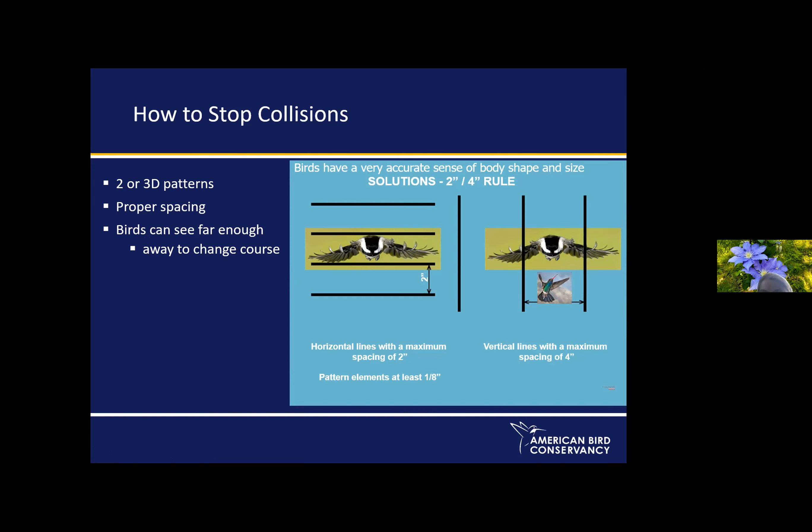We recommend that if you're using lines, which you don't have to, they be at least 1/8 of an inch wide. And if you're using dots, which is what people seem to be most attracted to, those dots should actually be at least 1/4 of an inch in diameter.

So here are just a few examples of bird-friendly buildings to show you that you don't have to warp your architecture. If you want to design a box of glass, you can design a box of glass. This happens to have a narrow horizontal stripe. It's extremely bird friendly, and yet you see out very well. And if you look at the building from the parking lot, you'd never know this was bird friendly glass.

When I first started doing this, I was taught to talk about the irony of green design, how sad it was that green design required these gigantic reflective curtain walls. It was only after I'd been working in this field for a year or so that I discovered that's not true—above a certain level, you start becoming less sustainable because you require bigger systems for heating and cooling.

So this is a really good place to start with bird-friendly design: start with sustainable design and start with a building that's going to be energy efficient. Although I realize that there are some issues with that too.

This is actually the FBI headquarters in Houston, Texas. It has this odd looking sunshade, which in addition to being a sunshade, also serves as a security device. And as you can see from most angles, most of the glass isn't very visible to birds, so it's also a bird safe device.

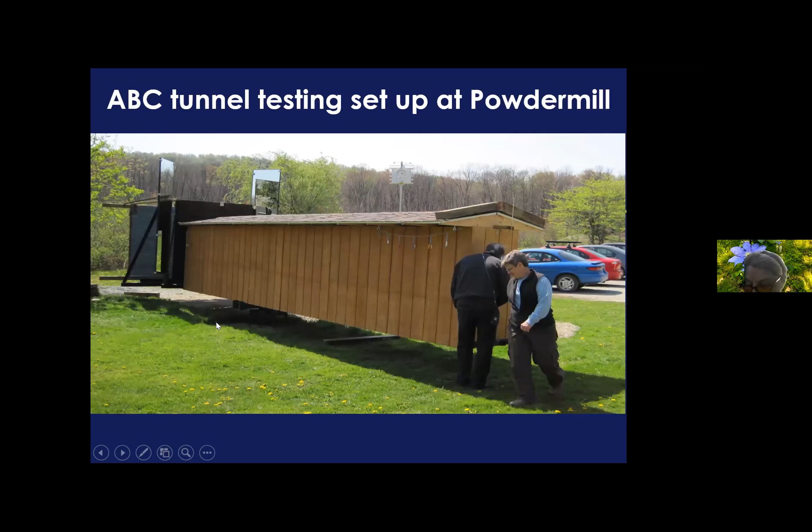So this is what it looks like when we put a bird inside a tunnel, which is what we call the thing. On the inside, birds see two possible ways to leave, and on one side usually is whatever we're testing, the other side is plain glass. You can see here there's a net stretched across the end of the tunnel so birds are not injured. As soon as birds have made one flight through the tunnel, we open this door and let them out, so we're not testing the same birds over and over again.

This is the basis of what we call threat factors, and threat factor is fundamental to New York City's legislation. It was a little bit of a surprise when they decided to do it that way. But we have been trying to expand our ability to rate glass so that this rating program doesn't become a bottleneck, and in fact, we're starting to construct a second tunnel.

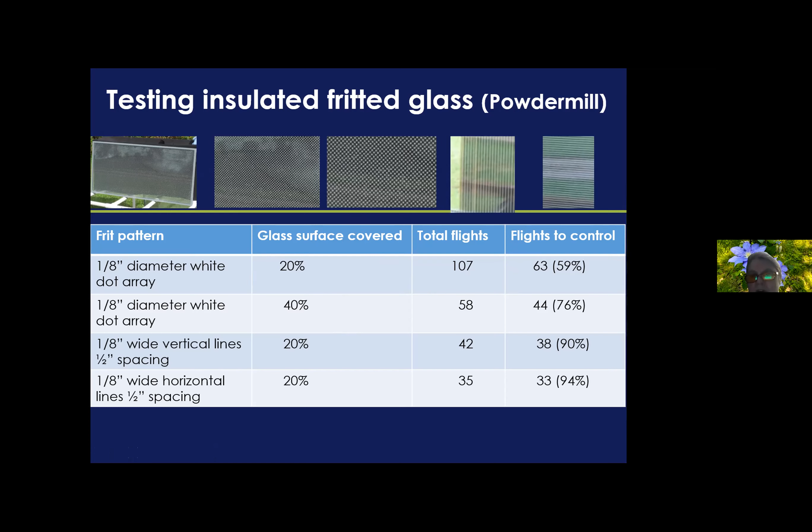I won't talk about this in too much detail, but this is one of the first things we looked at—it's why I say I hate dots. We looked at 1/8 inch dots with 20% coverage, then 40% coverage, and then 1/8 inch wide lines spaced 1/2 inch apart, back to 20% coverage. What we found was 20% coverage didn't work very well at all. 40% coverage worked a little better, but with the lines, 90 to 95% of the birds avoided the frit pattern. So lines are a much better signal to a bird. I think the dots look to them a bit like a fog bank—it's hard for them to process, and the dots are too small for them to resolve individually.

If you're interested in more resources, go to birdsmartglass.org—we've recently put a lot more information up on our website. Unfortunately our website can be confusing, so scroll down to find the menu. You can download bird-friendly building design, now available in English, Korean, and Portuguese. We also have home solution flyers available in English, Spanish, and Portuguese, which can be downloaded. We've got a gallery of designs and a searchable database of bird-friendly materials. And that is the end of my piece.

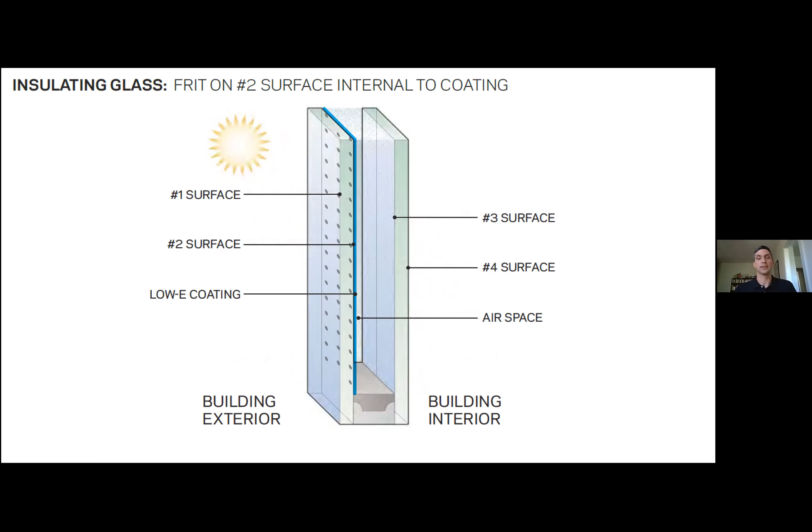Just briefly on glass—this is a diagram of insulating glass, typically two panes of glass. The outermost surface is the number 1 surface. The backside of that outside piece of glass is the number 2 surface, usually where we put a low-E coating for solar control. The inboard piece of glass has surface 3, and surface 4 faces the inside. The most effective place to put a visual cue to deter birds is on the number 1 surface, because it's most visible, in front of everything doing the reflecting. Further back, certain manufacturers can put the frit pattern outside of the low-E coating, which is also a good position. Some manufacturers have to put the frit inside the low-E coating, which is a little less effective, and less effective still further inboard.

Here's another diagram showing the newer UV patterning technology, which works a bit differently. There's the basic assembly with a low-E coating shown in blue, but outside of that you have UV patterning, similar to a low-E coating—metals sputter-coated onto the glass that reflect UV light in the UV spectrum, which birds can see deeper into than we can. Shown in yellow, a laminated lite of glass typically needs a UV-absorptive layer in the lamination, which allows the relatively weak UV reflection to actually show up against that UV-absorptive background. So just some basics there.

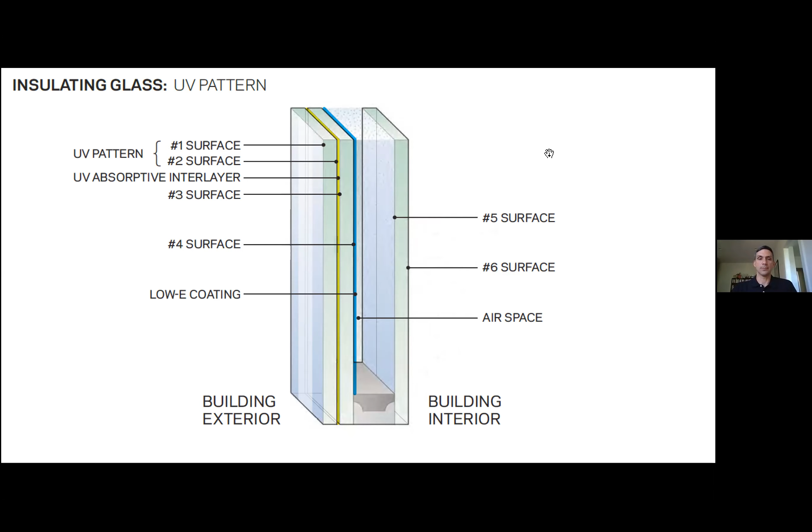Okay, here's the Center for Global Conservation. We designed it in about 2004 or 2005. At the time, Chris and other experts had some ideas about what would work in terms of bird collisions, and we tried some of them. Some worked and some didn't. It was a great lab, and it sounds like Maine Audubon is going to do something similar and test a bunch of strategies, which is great. This building was pretty important—not only is it at the zoo, but it's also in a heavily wooded corner outside of where people usually visit.

Here's some of the strategies that did not work. It was thought that overhangs were enough to deter collisions at one point. Definitively, we found that the various overhangs in the building did not deter much of any collisions at all.

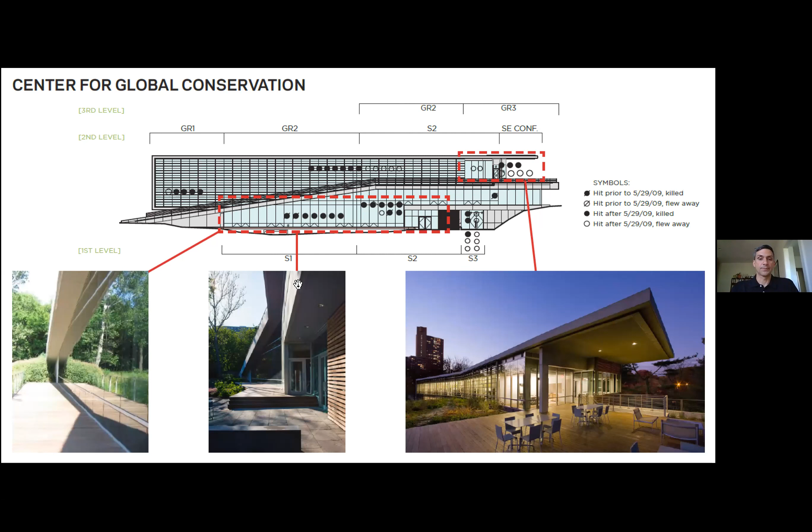We tried solar shading devices outside of the glass—these are wood slats. Unfortunately, there were supposed to be twice as many of these, so the spacing would have been twice as close. It might have worked if it was twice as close, but these ended up being about 15 inches apart from each other. It turned out that birds in flight just saw through them, and there were a number of collisions there.

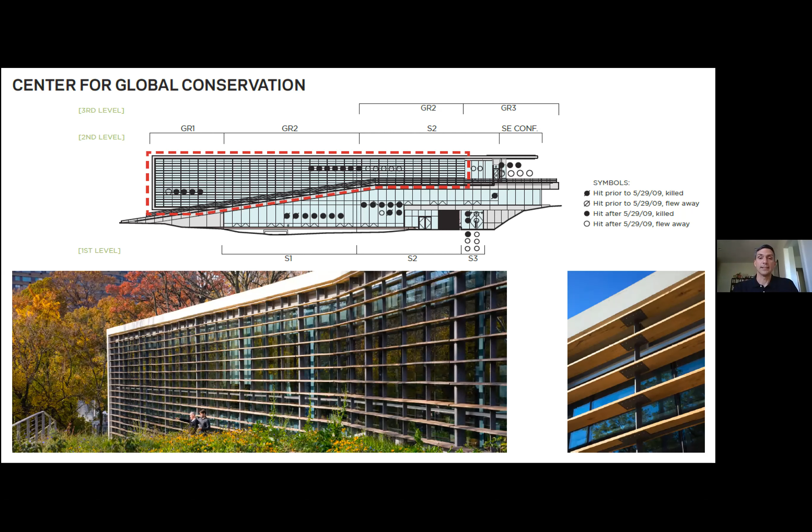I should note that on top of these images there's a diagram with black dots and circles—that's from one season of monitoring that Chris and her team performed. It's really super valuable to have that monitoring data so we could tell what worked and what didn't.

Something that did work was this UV reflective material—this is the version available at the time. I think this was maybe the second building in the United States to use this stuff, and we could only afford it in one room, the main conference room here. You can kind of see the vertical lines of it in the image, but being in the room, it's very unobtrusive and doesn't call attention to itself whatsoever. In this particular migration season, they had no collisions on that glass, and I believe they haven't had any collisions at all. So it actually worked very well.

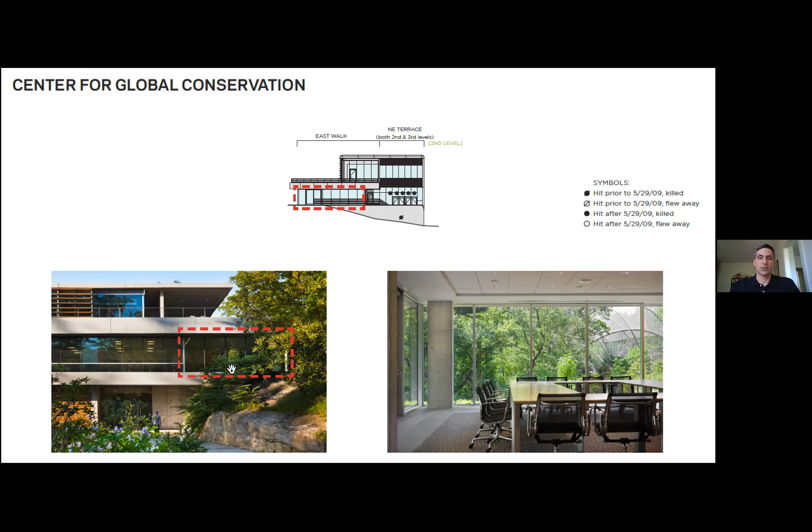Since then, as Chris and her team were working there, they ended up retrofitting some areas where there was no mitigation on the glass. Here's an example of some lines that were applied—it's just vinyl material, kind of like applying a logo on a storefront. She had that stuff applied in various places around the building. So, really great test case building.

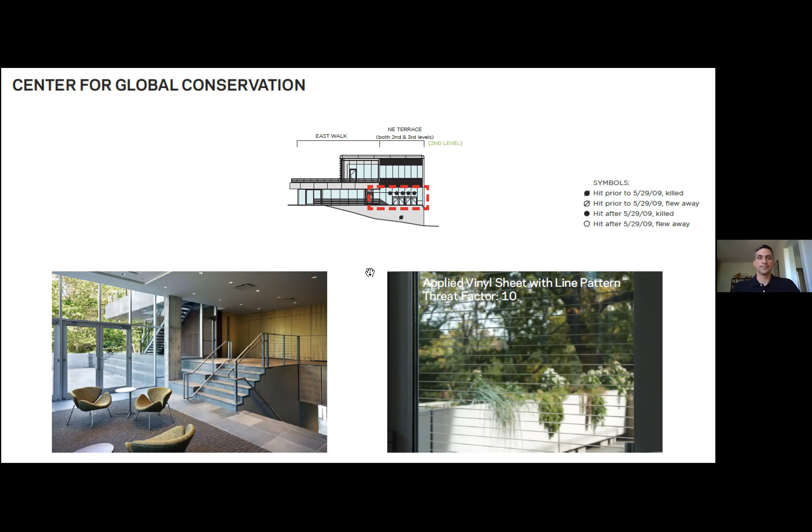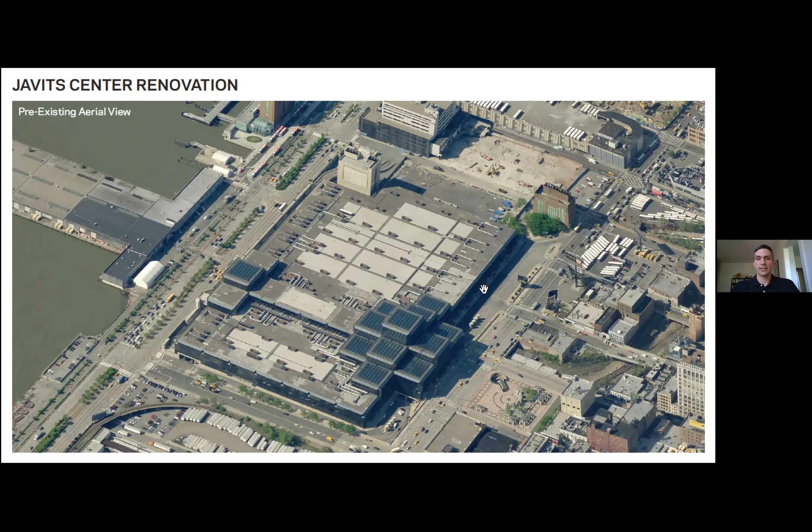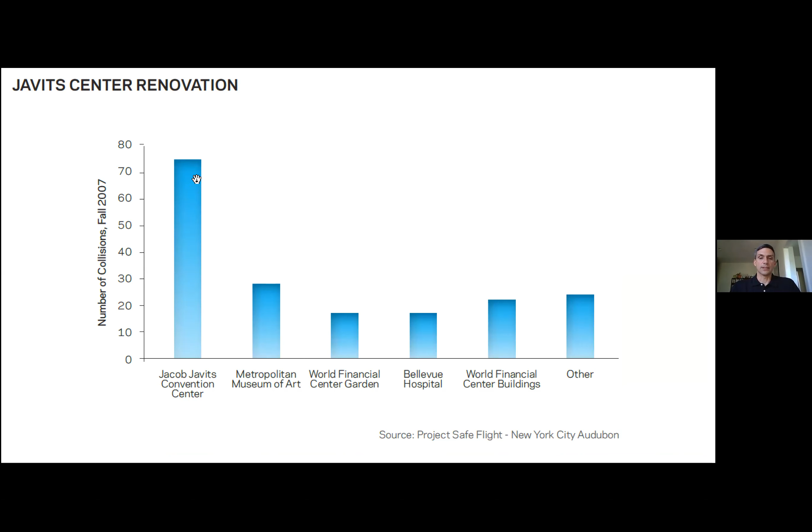From that building, we worked on this major renovation of the Javits Center in New York City—a super, really, really glassy building. It was really dark glass that was very reflective, and it was one of the bigger bird-killing buildings—actually the worst building in the city in terms of how many birds it was killing. So we knew we had to do something about it. Here's the building—you can kind of see how much glass there is.

There were a couple of issues here. One was that we wanted to put a green roof on this building, and we did—I forget exactly how many acres, it was like 7 acres or something like that of green roof. So not only did we have this problem of glass, we were also adding habitat and actively trying to attract birds and other urban fauna to the site. So we were kind of exacerbating the problem.

Our solution was twofold. One, we actually replaced some of the glass with opaque materials, which we did where it wasn't vision glass anyway, so we were able to rationalize doing that. And then for the actual glass, we used a newer glass that was low reflectance and had a frit.

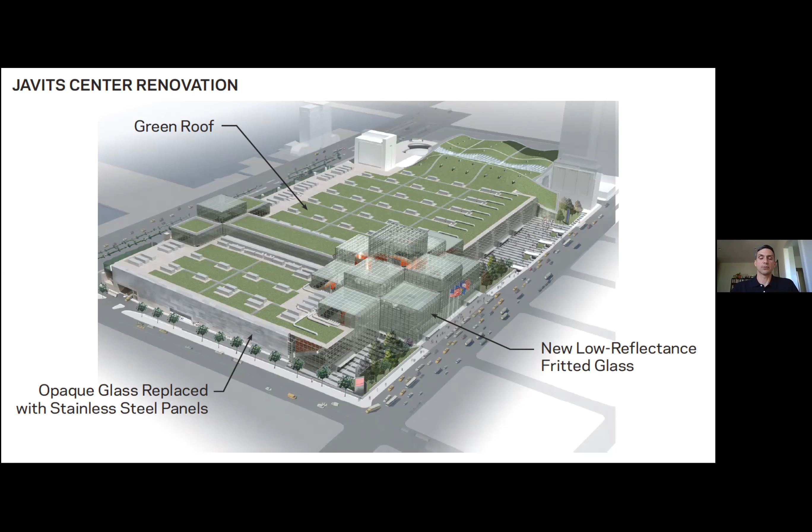So here's the green roof, and there's the finished condition, and there's actually birds nesting on the roof, so it's actually attracting. So here's the glass.

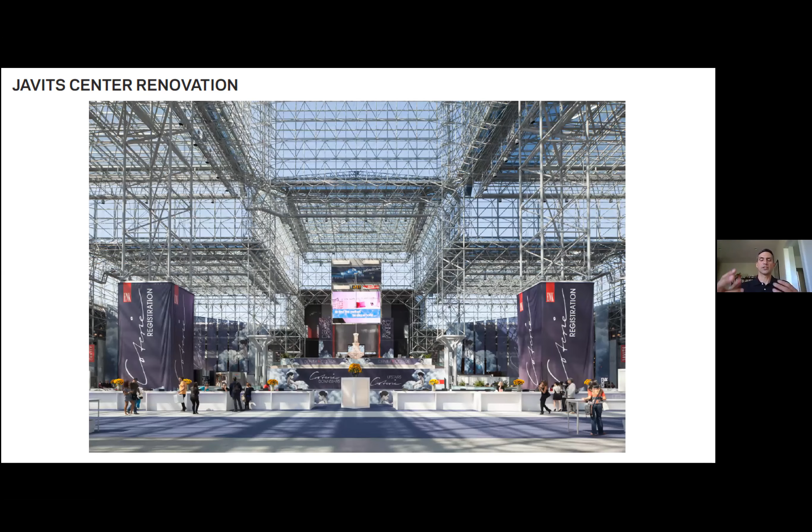There's a frit pattern, a relatively dense one. I don't know where it lands on that scale Chris was talking about in terms of density of patterns, but it works on the building—it doesn't have many collisions with the glass. Here's what it looks like. This is a big building, so you're very far away from the glass, and these small dots don't really show up at that scale. Here's a close-up from the inside. You can kind of see a slightly gauzy effect on the skyline, but nobody complains or anything.

The way that we rationalized having this frit, to kind of pay for it and have it last through value engineering processes—we're always trying to cut money from buildings—was that it reduced the solar heat gain coefficient of the glass, which was all about reducing energy loads and making the HVAC, the cooling equipment, smaller. So we were really trying to save money, save energy, reduce the energy use of the building, and using this frit was a great way to do it.

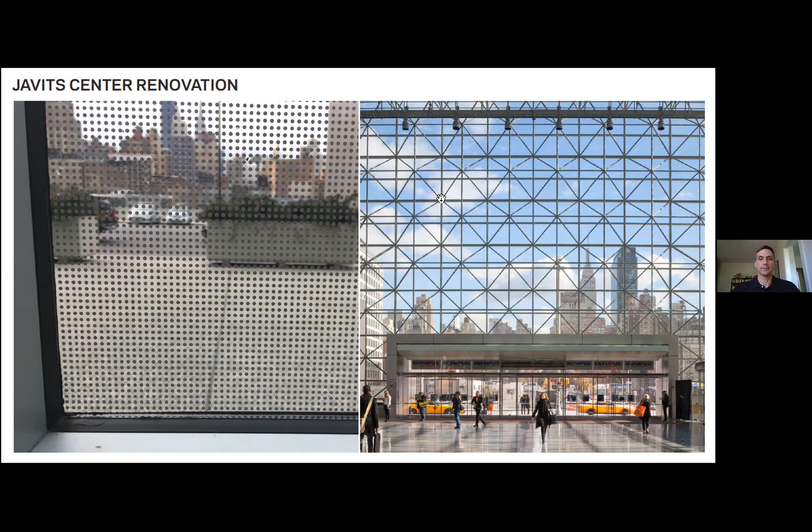And simultaneously doing that, but also kind of opening up the view in and out from what used to be this really dark, sunshade-kind of building. We were able to do that with this frit pattern. Here's a view from the outside. Good results—this particular migration season there was a 90% reduction. I think some years it was more like 95% reduction in collisions.

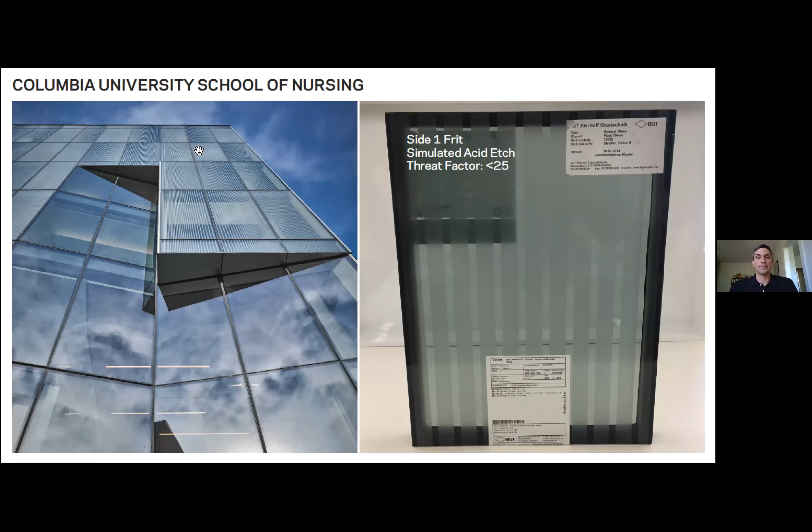There you can see it's the lines in the upper part of the building. Again, this building did not have a pretense of trying to address bird safety—there was a different benefit. The two benefits I would call out are that the neighborhood is predominantly residential, so there's all these residential buildings across the street, and Columbia University was very conscious of wanting to avoid the kind of slickness that a glassy building brings with it. They were trying specifically to address reflections—harsh reflections into neighboring apartments and the street life. This #1 surface frit was very effective at subduing the negative perceived effects and glare from the building.

And then also there's a certain level of privacy created with this frit pattern. You're looking here at a study area in the corner of the building, so students can come there and study without being spied on by the neighbors, and the neighbors don't have to feel like the students are looking at them either. So privacy and being a good neighbor.

This building's under construction at the Columbia University Business School. Again, no pretense of trying to be a bird safe building. We're actually the architect of record, but Diller Scofidio + Renfro designed this one. It's got this very binary glass design situation where there's super clear glass on half the building, and then this #1 surface white frit on the other half. I'm really anxious to see what happens when this building is finished.

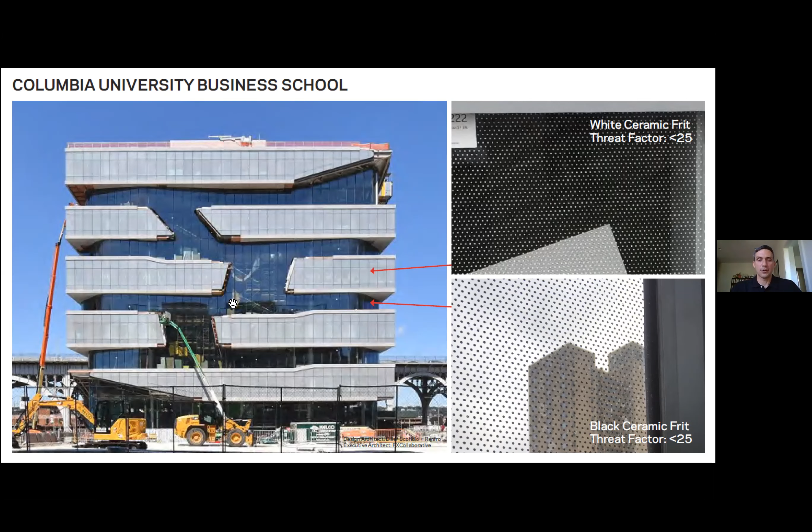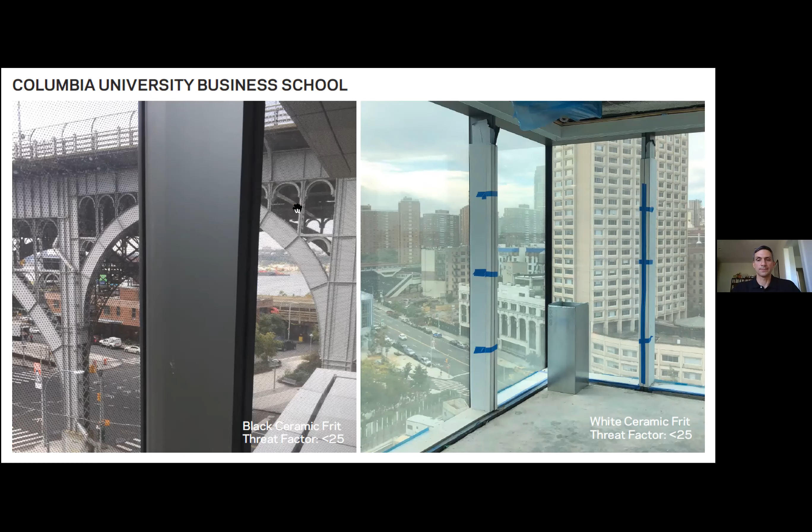Again, it's kind of not obtrusive to the feeling of being inside. You can see in, light comes in, you can see out, and it's going to be a nice interior space. Last one, the Statue of Liberty Museum.

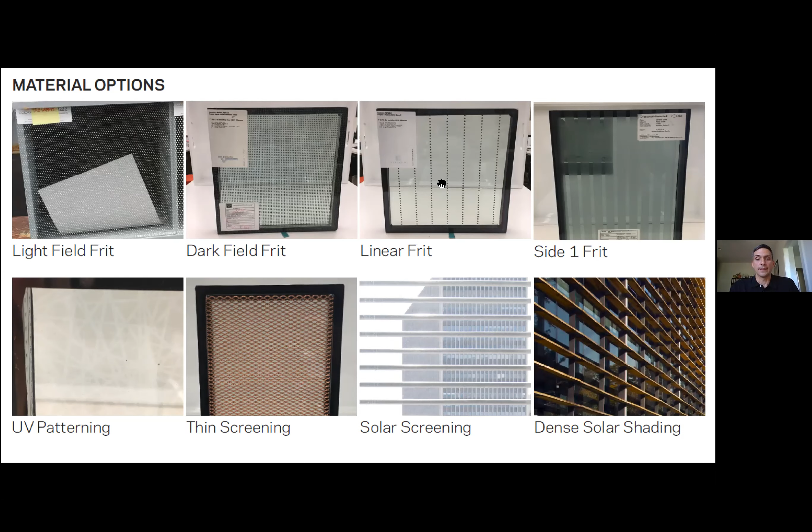Just briefly on the current situation in New York City: there's this law, Local Law 15 of 2020, and it's pretty strict, and we're having to deal with it now. Essentially, not all glass—90% of all glass under 75 feet is subject to this law and must be bird friendly.

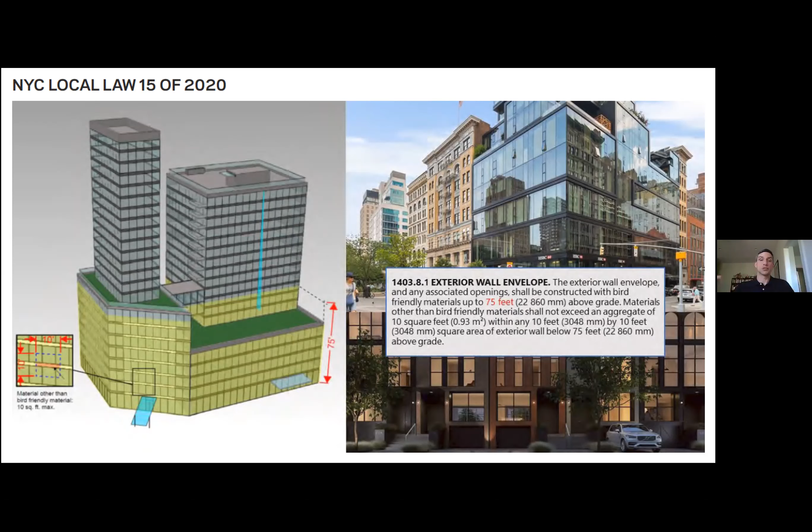And more than 90%—it's broken down into every 100 square feet, 90% of that glass has to be bird safe. So you can't take some corner of the building, make the whole corner regular glass, and just do bird safe glass somewhere else. It's got to be distributed so it actually works.

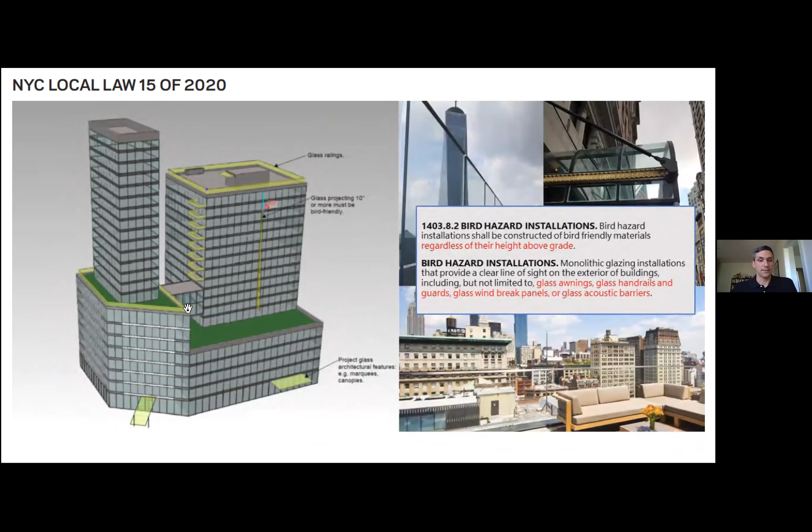I'll skip that one—so, around green roofs, anywhere up the building. This is about glass guardrails: glass guardrails at any height of the building, even if above 75 feet, must be bird safe. Corners would create fly-through conditions, where a bird might see through one corner of the glass out the other side. Those must be 100% bird safe—you don't get that 10 square feet of leniency at the corners.

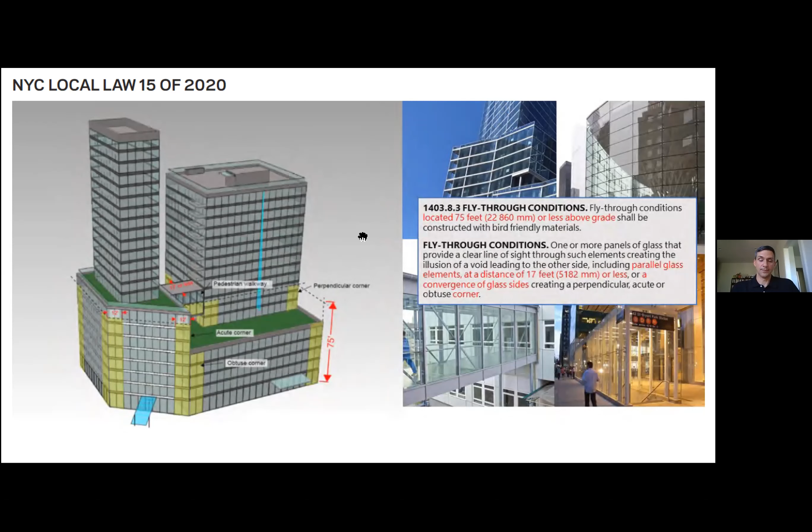And then at green roofs, again at any height of the building, if you have a green roof 100 feet up and there's glass adjacent to it, up to 12 feet—essentially one floor of glass adjacent to green roofs—must be bird safe. Bird safe in this context means a threat factor of 25, which essentially means it's very bird safe.

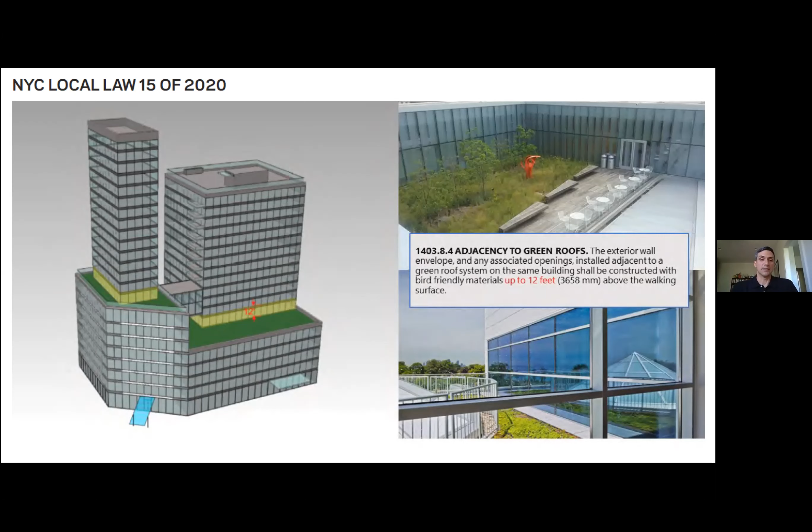New York City got really activist. Chris's group, the American Bird Conservancy, says a threat factor of 30 is bird safe. New York City decided to be even more strict than that and tuned it down to 25. So according to those rules, two of the buildings I showed you would actually comply, and the others wouldn't because of this coverage issue—the Statue of Liberty Museum, the Javits Center.

So there's that. Here's my slide of other examples. I just wanted to say that our architecture is not all glass—people do form making with all kinds of materials. Personally, I'm a passive house designer. I like to design with opacity and solid materials.

So there's a synergy between energy efficient design, which has less windows, and bird collision mitigation. So it's just not the kind of work we do in the city.

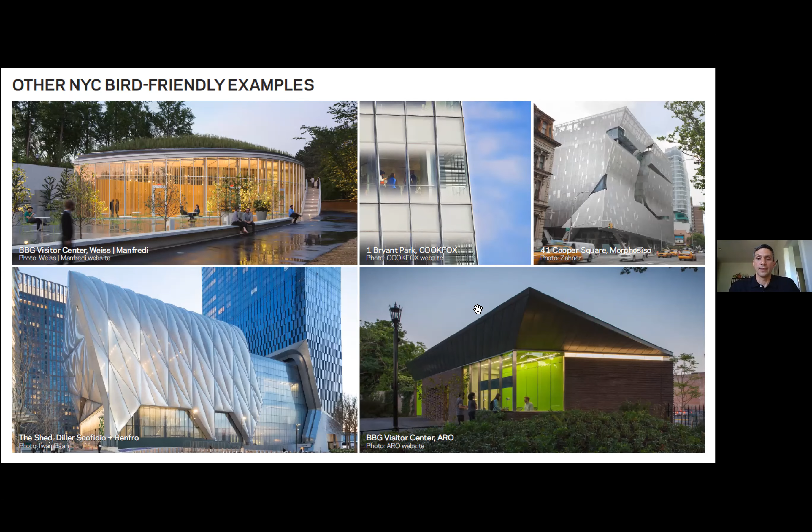And now that this law is in effect, it's in effect for all building types. You'll notice conspicuously there were no residential buildings in my examples, and that's because we haven't been able to convince any residential building owners to do this. But now they have to by law.

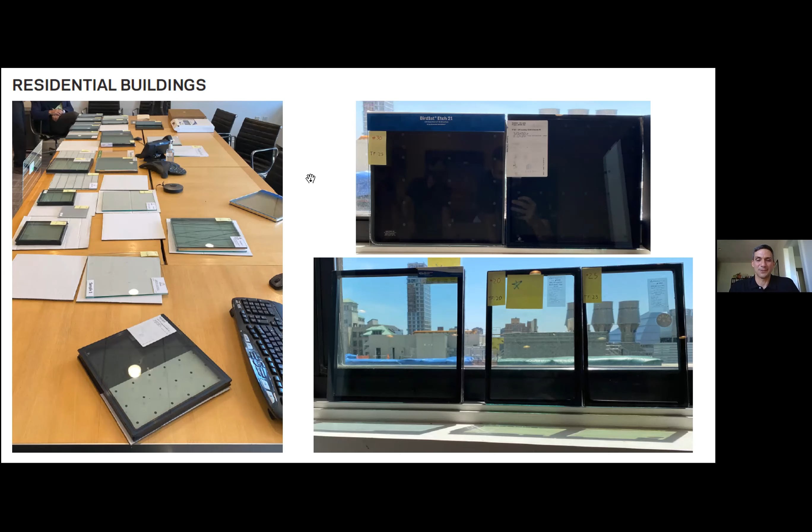So that is the end of my presentation.

Thank you, Dan, that was awesome. I am very curious to see how residential does come into this, so I can't wait to have you back to see.

Terry, who I also have to give a shout out to, is my husband's aunt, who is on Bainbridge Island. She's a landscape architect, her husband is an architect, and I'm really thrilled to have her on the call. I think this is great.

The ask here is the height of 75 feet. And where did that policy come from? Yeah, 75 feet came from...

There was a group of us helping the city, and we looked at tree heights. Per Chris's expertise, birds are mostly hanging around where there's vegetation, and there are many street trees in New York City. We looked at some parks. It's common for there to be tall buildings around parks, and we found that some street trees can grow to 100 feet. But 75 was arrived at because there's a definition in New York City building code that a high-rise building is 75 feet or taller. So it was a little bit arbitrary - there was really no way to scientifically say the trees are only so high, birds fly this high over trees. It had something to do with picking a relatively high number that related to New York City building code.